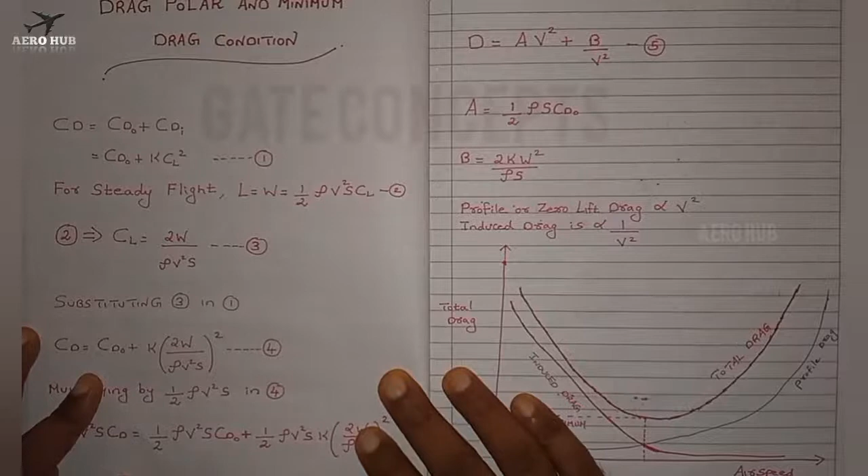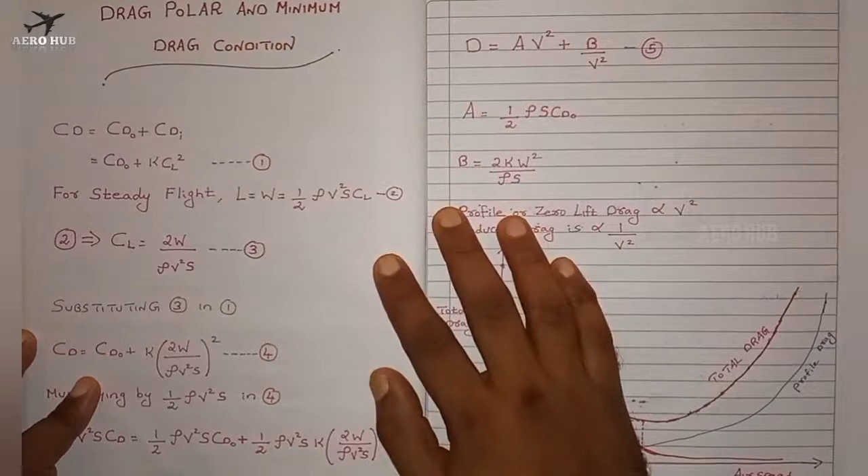In the previous lecture we discussed thrust required for level and accelerated flight, and also minimum drag condition. In this lecture we will continue the discussion about minimum drag condition, as well as discuss drag polar. Okay, so we have the famous equation CD is equal to CD naught plus CDI.

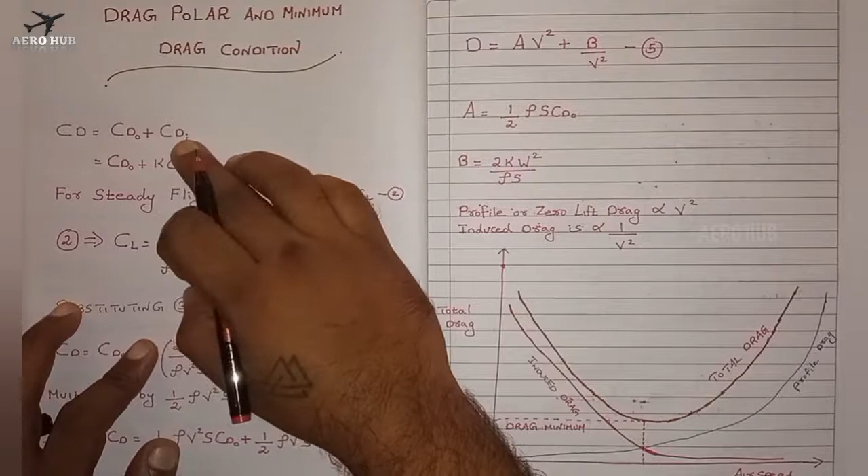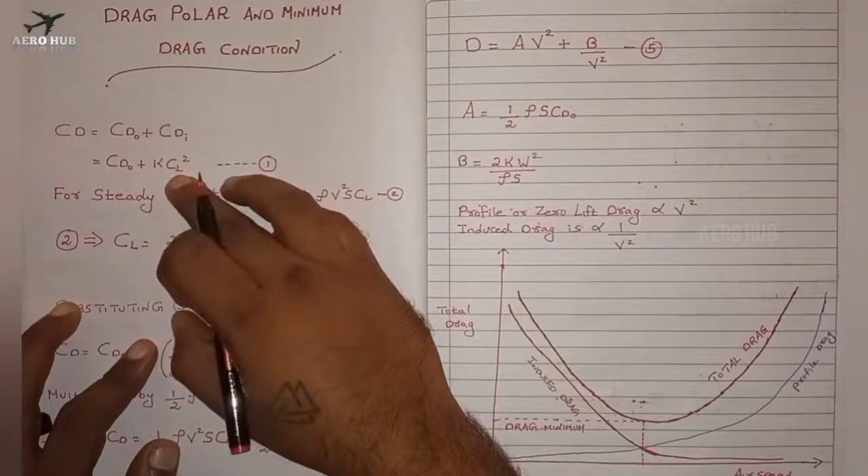CD naught is nothing but the zero lift drag. CDI is nothing but the induced drag. And from the previous lecture, I can write CD is equal to CD naught plus CDI, where CDI is equal to K CL square, and the value of K is equal to 1 by pi into E into AR, where E is the efficiency factor and AR is the aspect ratio of the wing.

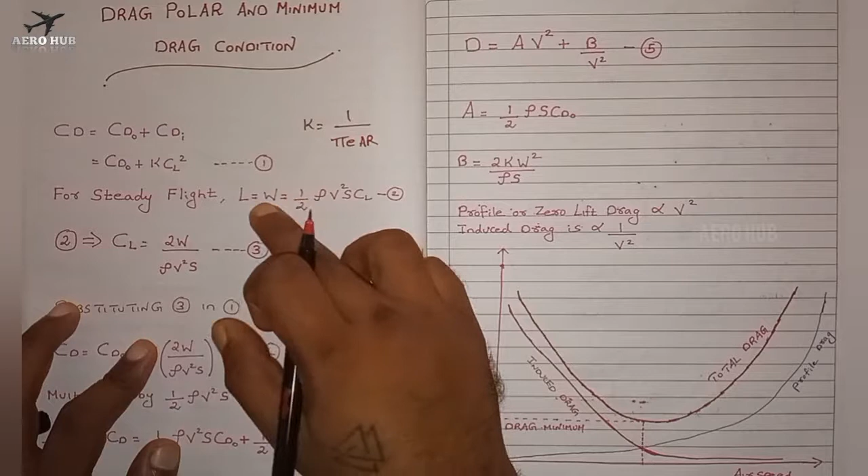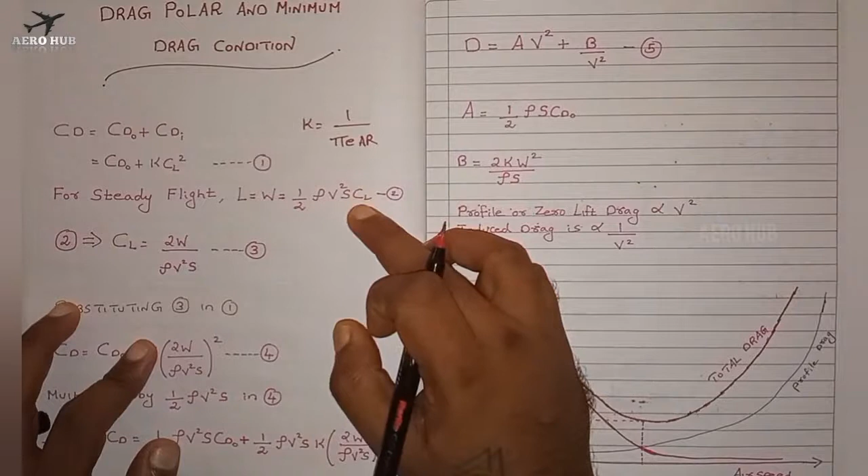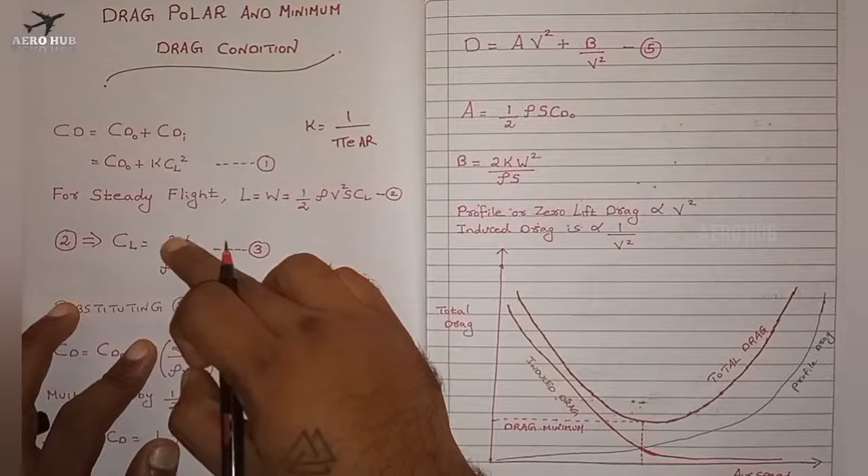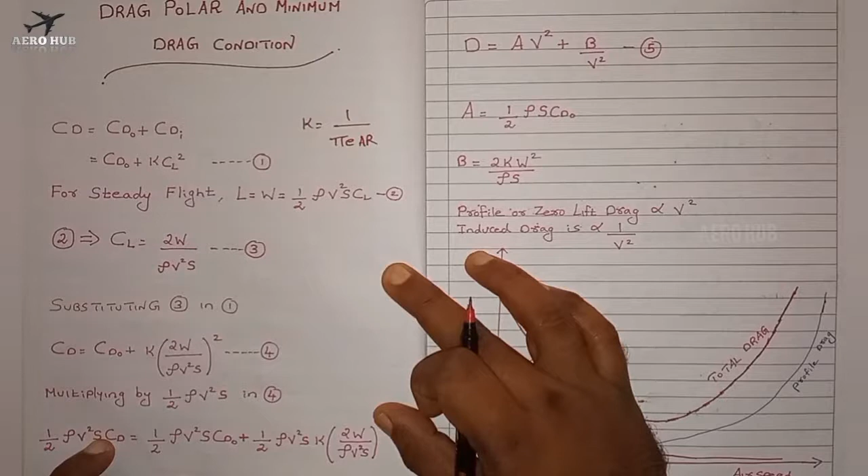Okay, and for a steady level flight, lift is equal to weight, and you can write lift is equal to weight as half rho v square, that is nothing but the dynamic pressure, into the wing area S and the coefficient of lift CL. From equation number 2, I will find out the value of CL. So I will be getting this expression, CL is equal to 2 times the weight of the aircraft divided by rho v square S. Rho is the density, v is the velocity, S is the wing area.

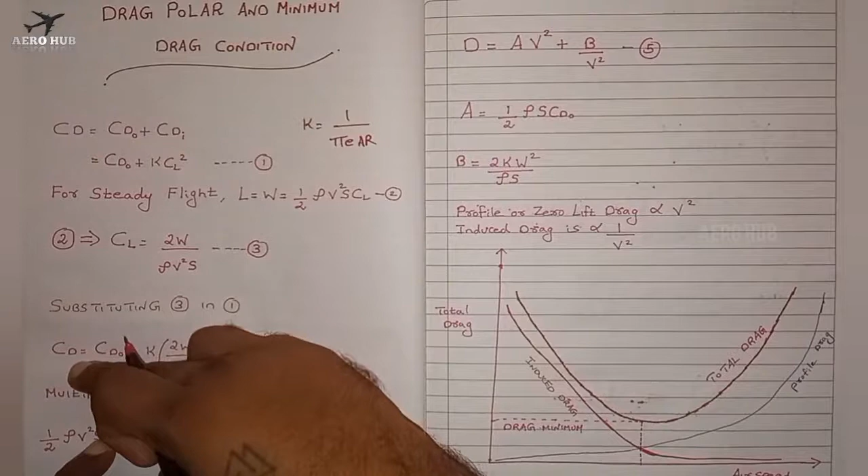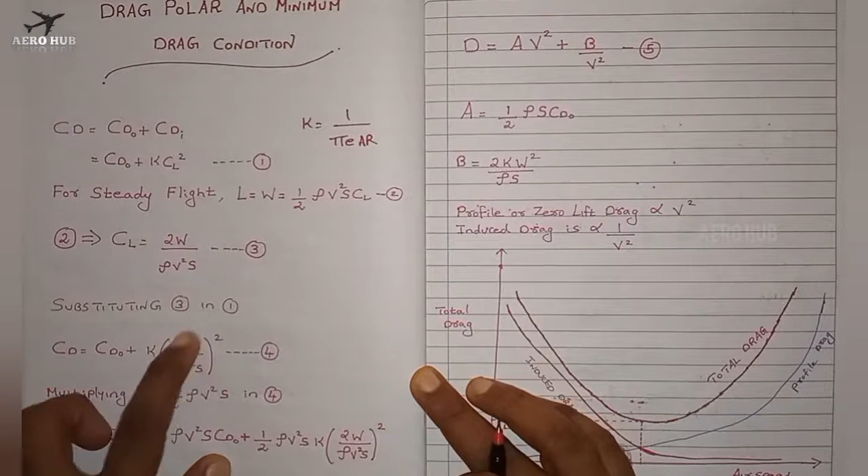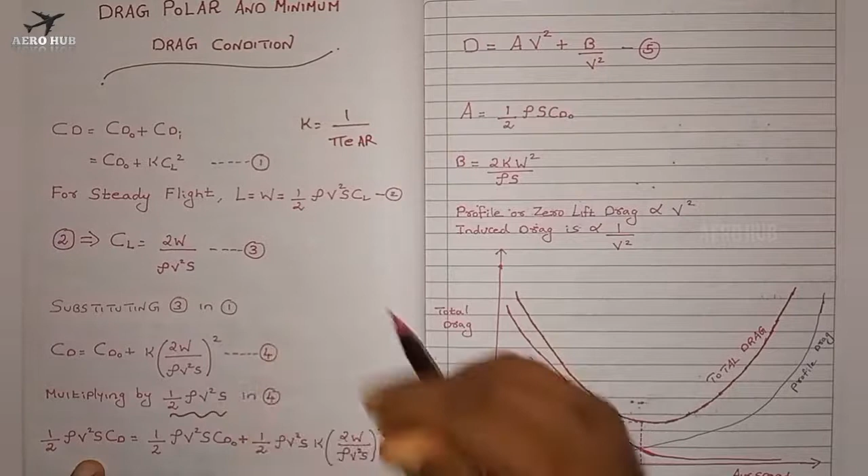Okay, now I'll substitute equation number 3 in equation number 1. I'll be getting CD, which is nothing but the drag coefficient, is equal to CD naught plus K into, instead of CL, I'll substitute equation number 3, 2W divided by rho v square S the whole square. This is equation number 4. Now what I will do is I'll multiply equation number 4 by this term half rho v square S on both sides.

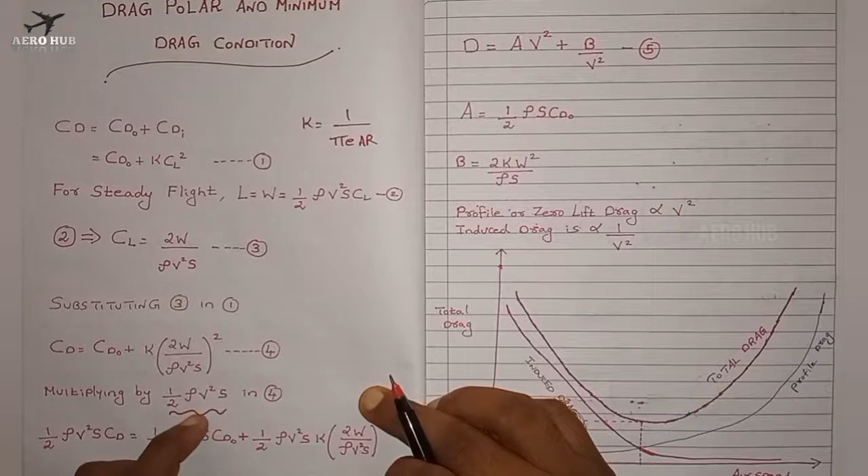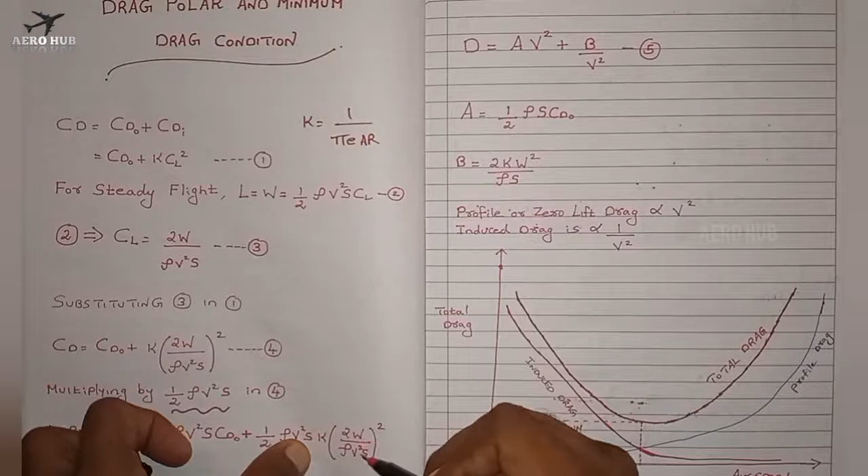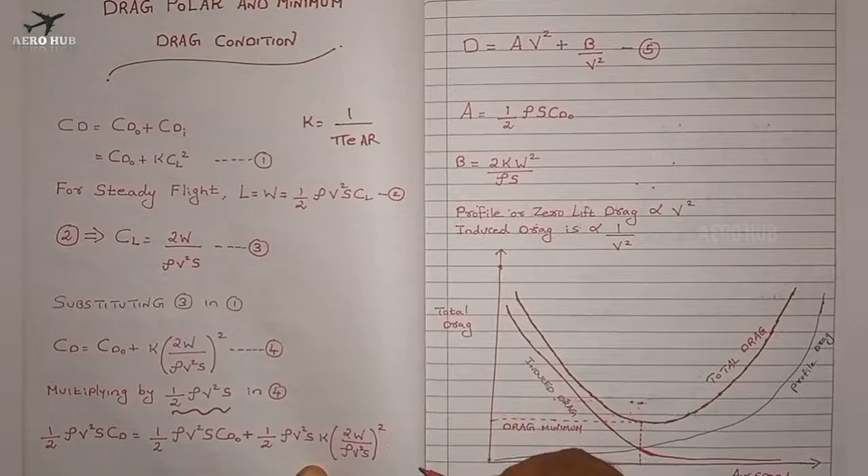In both sides of equation number 4, I'll multiply by half rho v square S. So I'll be getting this equation: half rho v square S CD is equal to half rho v square S CD naught plus half rho v square S K into 2W by rho v square S the whole square. This is for zero lift drag, and this expression is for the lift induced drag. I can cancel this part, half rho v square S, because we have a square term, and I can cancel out this 2, and 2 square will be 4. Finally I will be getting 2.

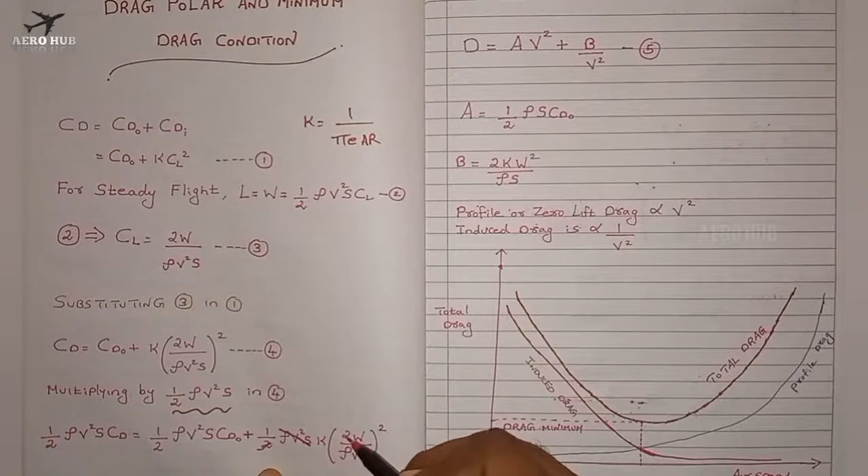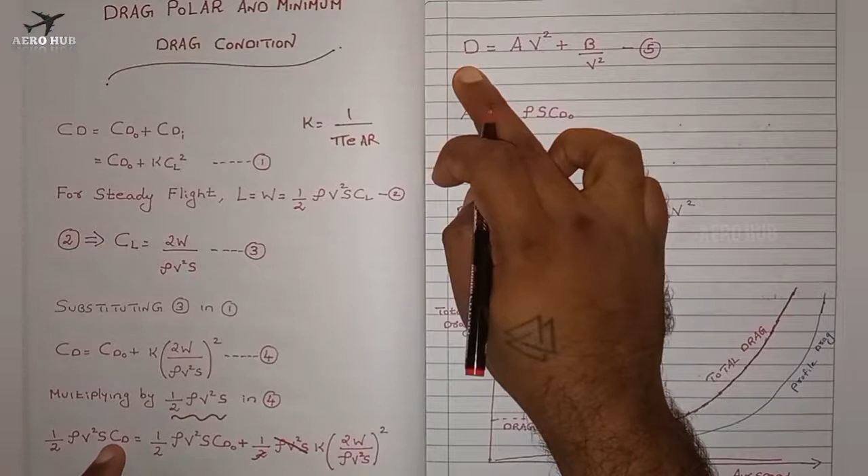Okay, so this equation becomes capital D. Half rho v square S CD is nothing but the total drag. Total drag is equal to a v square plus b by v square. If you observe this equation, I can write D is equal to half rho v square S CD. A is nothing but half rho S CD naught.

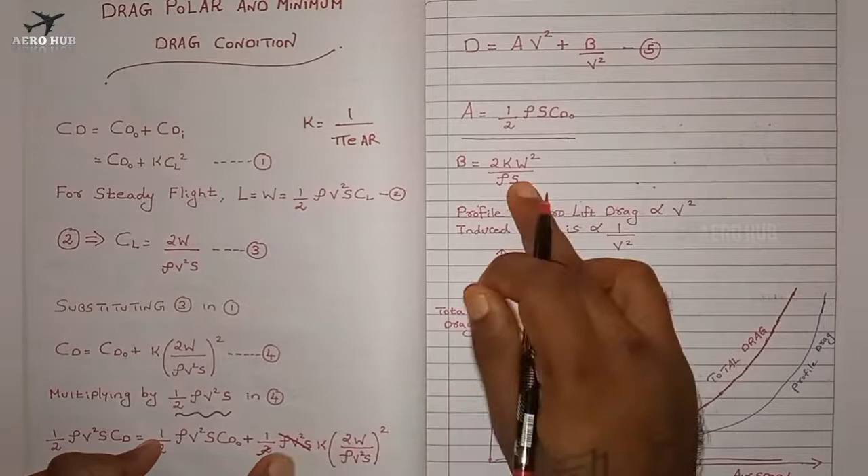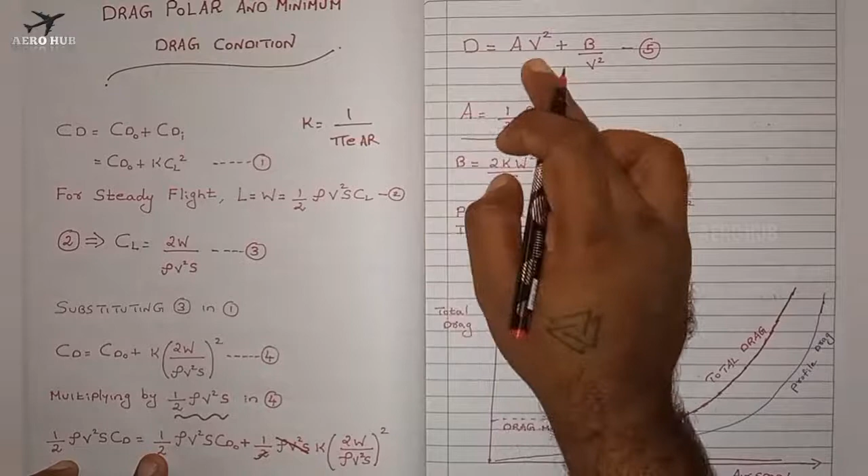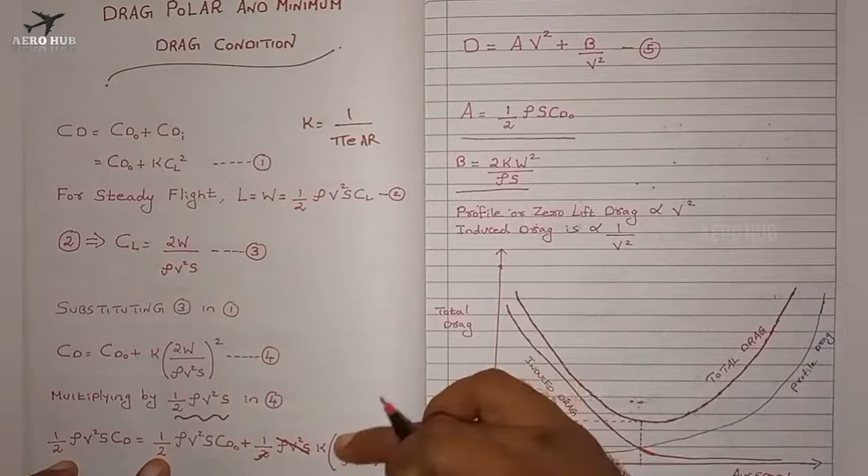Similarly, this b is nothing but 2 into K, we have a term left K, 2 into K W square divided by rho S. So D, the total drag, is equal to A into V square plus B divided by V square. And you can see here the profile drag is proportional to V square. From this equation I can get an idea.

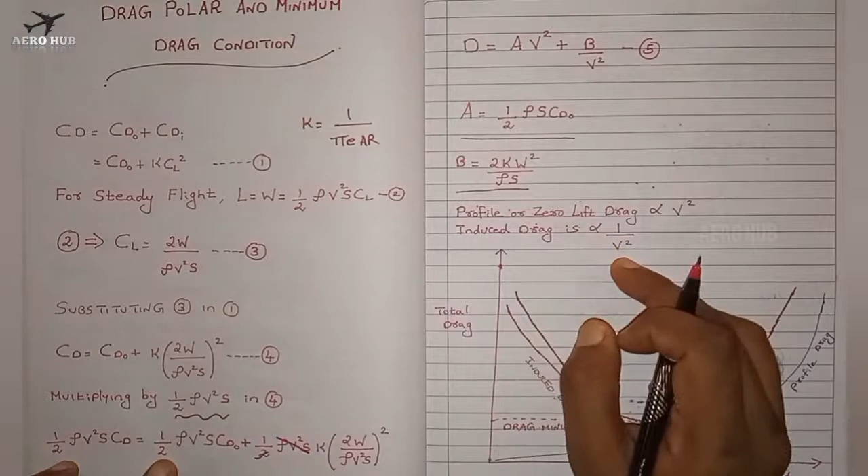The profile drag is proportional to the velocity square, and the induced drag is inversely proportional to the velocity square. That means the profile drag will be increasing when velocity is increasing, and the induced drag will be decreasing when the velocity is increasing. You can see the plot between the total drag and the airspeed. In the y-axis we have the drag, and in the x-axis we have the airspeed.

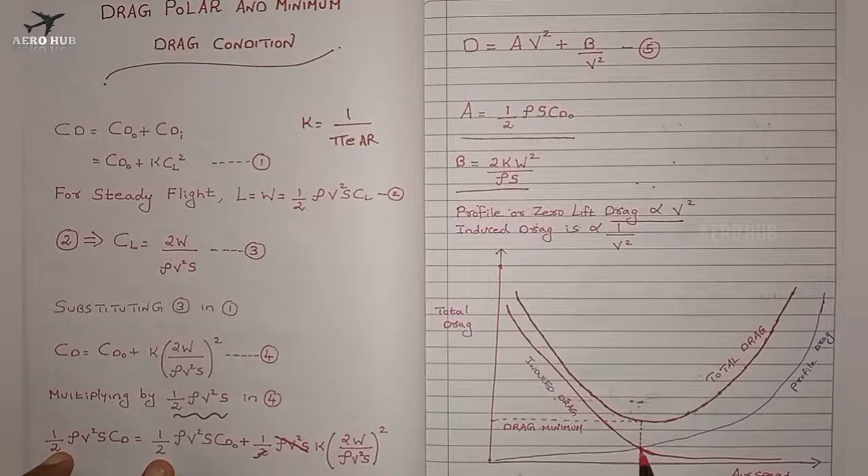And you can see here, in the case of profile drag, the drag is proportional to v square. When the velocity is increasing, the drag is increasing. This is the plot for profile drag. And for induced drag, when the velocity is increasing, the drag is decreasing. You can see here, the velocity is increasing, the drag is decreasing. And at the intersection of these two curves, we have the minimum drag.

And this curve corresponds to the total drag of the aircraft at a particular altitude. This is for a particular altitude, not for every altitude. This is for a particular altitude of a given aircraft. And if you take the line of intersection of both the profile and induced drag curves, I'll be getting something called the minimum drag for the aircraft. This is the minimum drag for the aircraft at a given altitude.

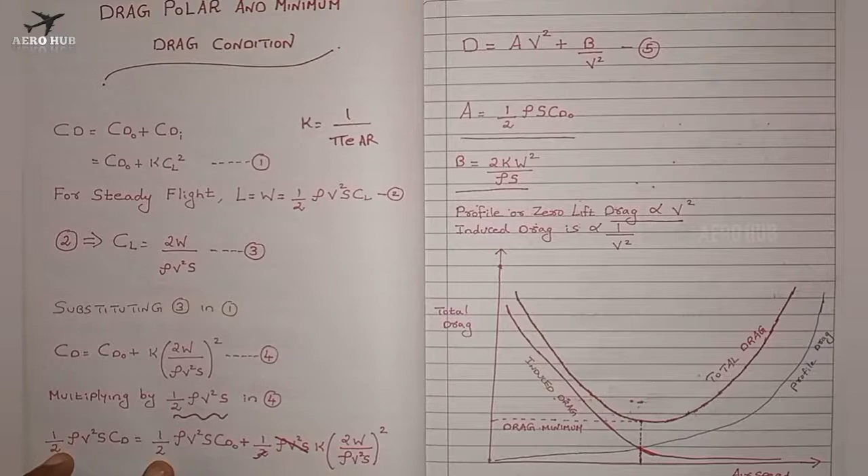So this is all about drag polar. This is basically simple, you have to always understand. When you have increasing velocity, there will be decreasing induced drag and there will be increasing profile drag. Now we will discuss the minimum drag condition, and also derive some important relations that are useful from the GATE examination point of view.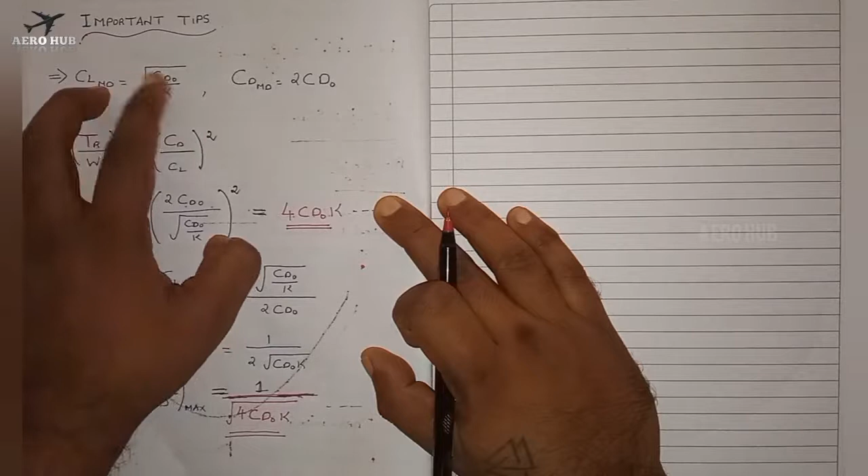In the last lecture, I discussed that the CL for minimum drag is root of CD naught by K, and also the CD for minimum drag is 2 CD naught. These two are really important relations. You have to remember these two relations. Then we have certain other important relations.

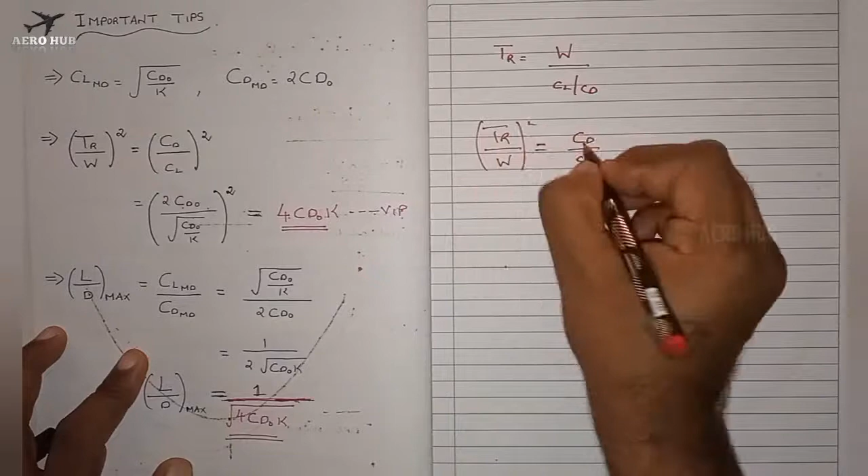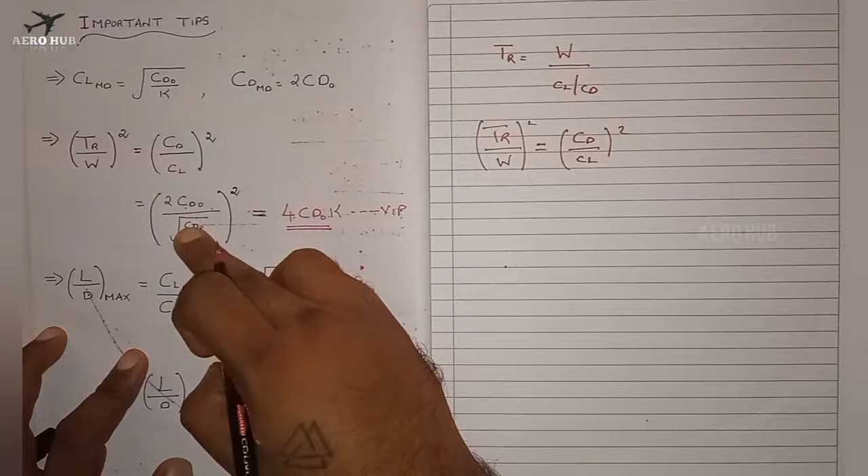TR, that is thrust required upon W. We have the equation thrust required is equal to W divided by CL upon CD. So I can write TR by W will be equal to CD by CL. Now we have the value for CD at minimum drag as 2 CD naught, and the CL for minimum drag is root of CD naught by K. Just squaring, I'll be getting 4 CD naught square, and we have CD naught by K in the denominator. I can cancel out one CD naught and K will be going in the numerator. So finally I'll be getting 4 CD naught K. This is really an important relation.

And L by D max is equal to CL of minimum drag by CD of minimum drag. We have CL of minimum drag as root of CD naught by K and CD of minimum drag as 2 CD naught. If I solve, I can cancel out one root of CD naught, so there will be root CD naught in the denominator, and I'll be getting 1 by 2 into root of CD naught K. So I can write finally L by D max is equal to 1 by root of 4 CD naught K. These two are important relations in the minimum drag condition.

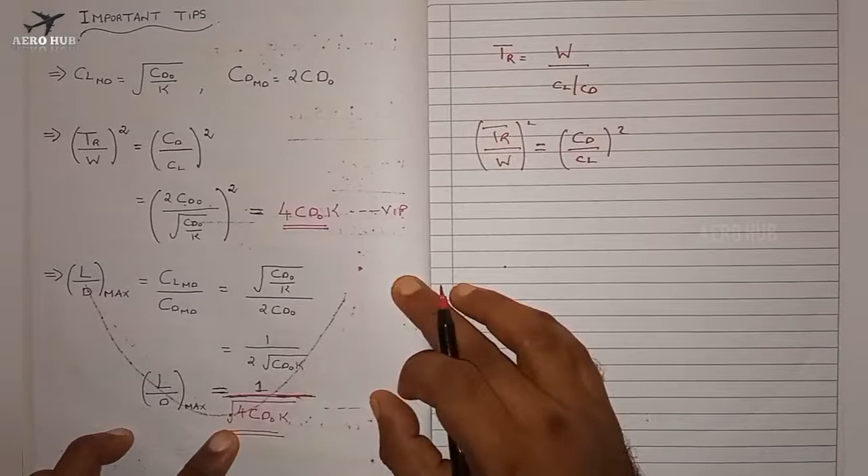In the next lecture, we will derive the expression for minimum drag. That's an important concept from the GATE examination point of view.